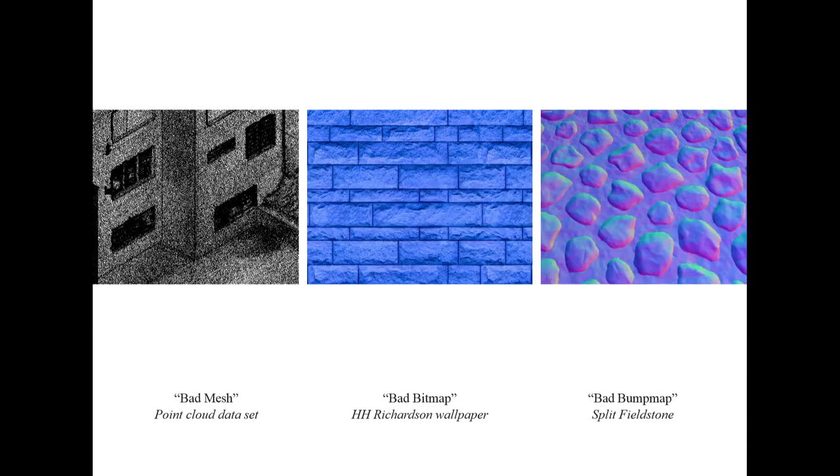So back in the studio, I have what I'm calling a bad mesh. It's a point cloud that's pretty dirty and messy. It's actually not accurate. I'm also combining what I'm calling a bad bitmap. So in this case, it's H.H. Richardson's rusticated blocks, and this is the wallpaper. And then the third thing is a bad bump map. So here I'm arbitrarily placing a split fieldstone bump to the render.

And so I did a series of renderings. Again, these are all in search for, the colors are so bad. Anyways, imagine pinks, blues, cyans, very pop colors. These are the materials that we're using both as the bitmap or the bump. So millennial pink brick, a cartoon made out of wood grain, vinyl siding, wood scallops, shingles, painted OSB. And so we start to take these materials and re-render House Lange and House Esters.

So this is a proposal for looking at, okay, they can be bricks again, but the bricks are going to be misaligned. There's going to be pink grout this time, and the pink grout is not going to be in the grout line. It's going to be on the surface of the brick. And so now I'm starting to think through, is it from renderings, is this a new set of materiality that can be made and constructed?

So here's OSB board, not OSB board anymore. It's a split fieldstone, and it's bright yellow. And then these are a bump map of a vinyl siding. Instead of doing it horizontally in the way we know siding is hung, it's at an angle, and then it has the image of the wood scallops.

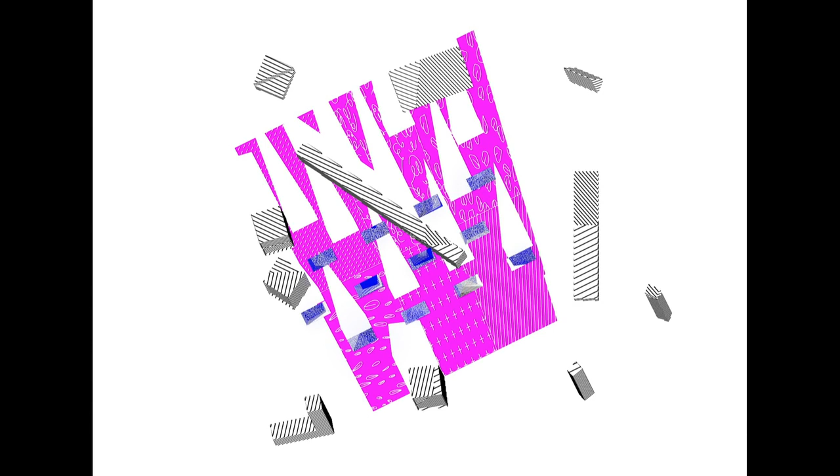Some of the materials. I won't go into detail, but it's a drawing first and a drawing trying to be built and spatialized in the public realm. So this is actually the plan of the project. This sort of looks like an axonometric, but it's actually the perspective. And then this is the axon drawing.

Number 4, propose a perfume strategy for a public park in Canada. So the next couple of projects were a collaboration with a former partner, Christian Stayner. This is just post-recession. There are no architectural projects to be built, especially for people just out of graduate school. And so we started applying for public art pitches. And we were pretty successful in making the short list. And the whole time, rather than giving the committees and these communities and these institutions public art, we always tried to spin an architectural idea out of it.

So in this case, we have proposed 11 perfume structures that would be spread throughout this park in Edmonton, Canada. Each of these sculptures is emitting a scent. It's a conceptual scent based on doing a reading of the history of the site. And as one would walk through, you would smell all these scents, and it would be a little confusing as to what time and place you are in the park.

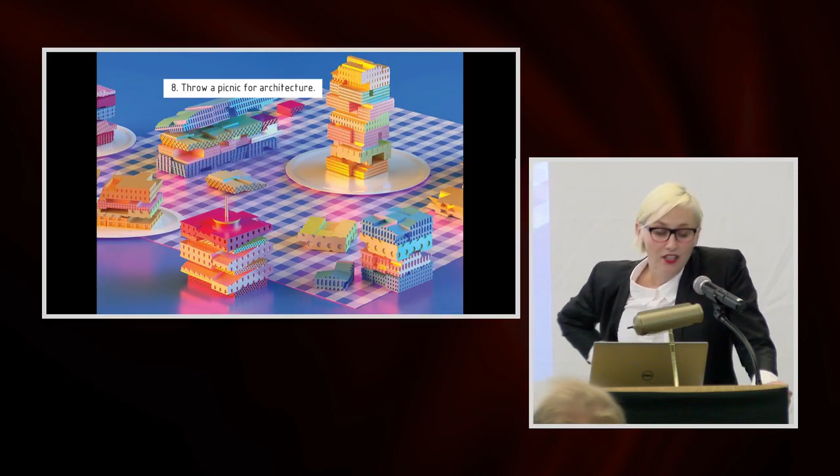Number 8, throw a picnic for architecture. So this is one of the images that's on your poster. So this is another way of hacking typologies. I'm now seeing the sandwich. This is a project called Best Sandwiches, as just another type, right? And so here you see a sub sandwich, a Dagwood, a BLT, a hamburger.

And this project is really about asking, this is a grilled cheese sandwich, asking, is there a way to think about architecture's problem of extrusion? So we no longer have to use extrusion singularly. We can now start to think about many, many layers and how different layers can stack without the kind of extruded tower.

And if you throw a picnic for architecture, you also have to photograph the sandwiches on plates in this kind of arrangement. This photograph was taken by a food photographer in Boston called Adam DeTour. These are 3D prints. The colors, again, are not good, but imagine pinks and cyans and yellows and more pink. And these are 3D prints, but they've been colored with flocking, so a very DIY craft kind of technique.

So the ambition is always to take conceptual work and turn it into real things, real buildings. So that happens in the faux brick project. It definitely happens in this project. This summer we looked at making this a BLT, actually a mid-rise tower in Atlanta. And of course we had to throw a picnic for it in some park in Cambridge.

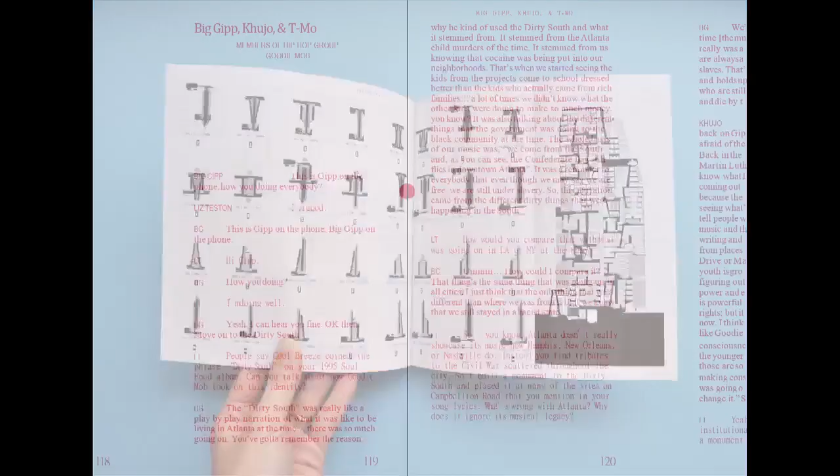And so rather than trying to figure out who the architects are of the Dirty South, we looked to the city and we looked at strange urban patterns that have happened over time. We clearly looked at John Portman's work. This is a student, Ian Freilich, who drew every atrium and then proposed an even stranger atria project. Half of the book is actually a guidebook with real places to visit and to see in the city.

Half of the guidebook is a conversation between the students and people like Big Gipp, Khujo, and T-Mo, some of the members of Goodie Mob, Denise Scott Brown, John Portman, Mack Scogin and Merrill Elam, and other theorists. So it's kind of an oral history recording. And you have to get the book to know what Goodie Mob says about why Atlanta got the 1996 Olympics, which is on page 120, which I'm not going to tell you. So it's on Amazon.

Number 10, question how architectural models are displayed. So this was a big project for me at the GSD where I was asked as a faculty member to be the editor of a student publication, the annual yearbook, I would say. But in this case, the dean really asked each of the faculty members to take it on as an intellectual project. So to read the pedagogy of the school and then package it in a way that's like a quick look into that year.

And so I was given a room full of brown chipboard and cardboard models and some white card models and white 3D prints, and just was not satisfied with the aesthetic that was going on. And so I did two things. One was to use this idea of a still life as the framing device for organizing work. So one could put work of a landscape architecture student beside an architecture thesis project, beside a core studio. And to momentarily put these things in relationship to each other in a temporary frame starts to say something else about the work.

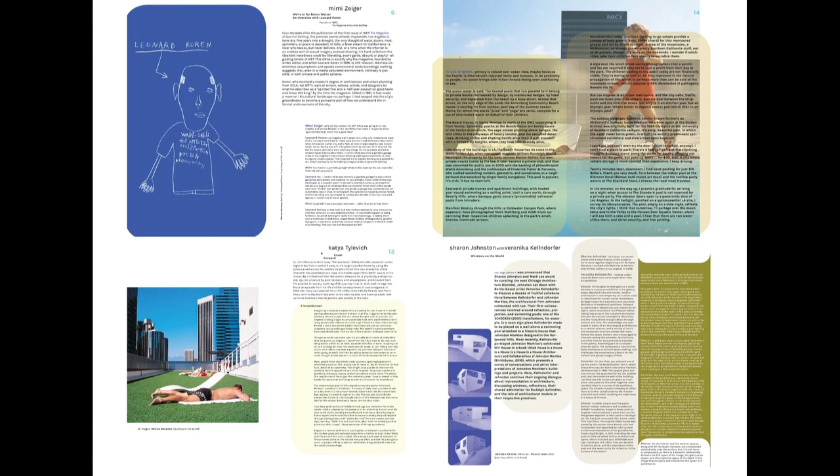And yeah, April decided to turn all the text a different direction. Okay. So I think those projects explain my architectural interests. It's work that usually begins with a question rather than a sketch, and it relates directly to popular culture. It's graphic, and it does heavily rely on art practice as inspiration.

So to describe Haus Gables, I'd like to place emphasis on 3 representational models: 1 being the massing model, 2 being the dollhouse model, and the 3rd being the one-to-one model. And so first up, we're going to look at the massing model.

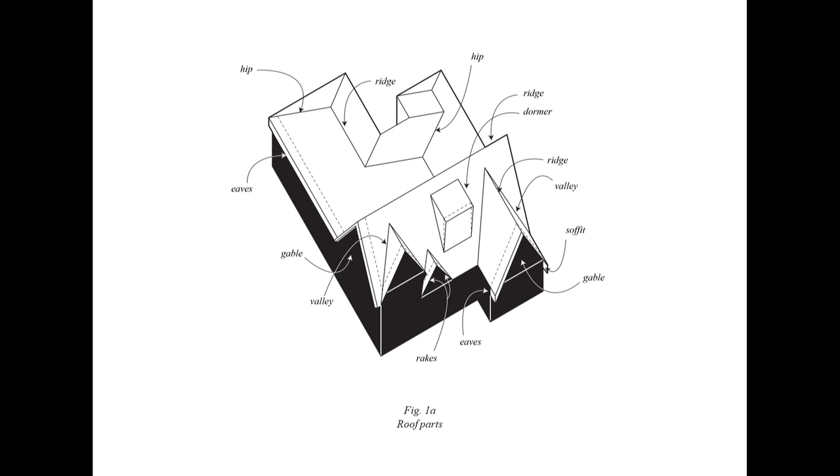Ordinary architecture is often overlooked. It's a throwaway. It's the stuff that's immediately accessible but usually tossed aside. I ask questions: what is the ordinary and why is the ordinary relevant now? And how might we flip the ordinary into a representational project? The ordinary is what I've termed the contractor stockpile.

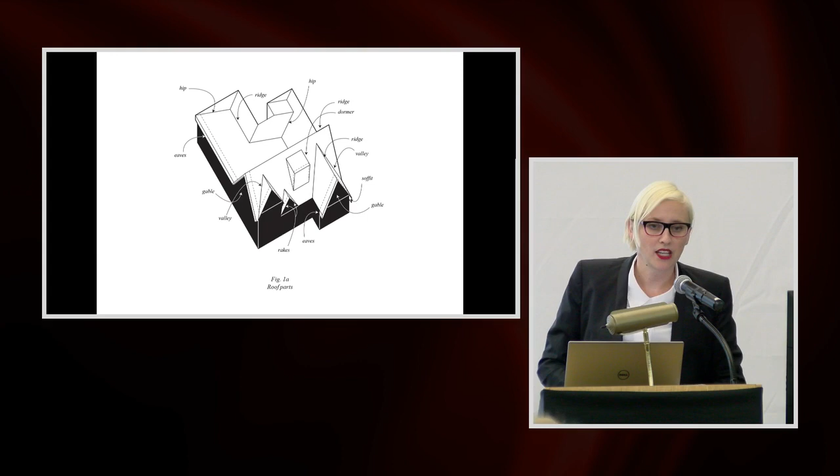So these are all things pertaining to the roof. The lingo goes like this: eaves, ridges, valleys, rakes, soffits, gables, hips, and dormers. One of the literary references for the contractor stockpile is Hawthorne's House of Seven Gables and the hashtag domestic hats.

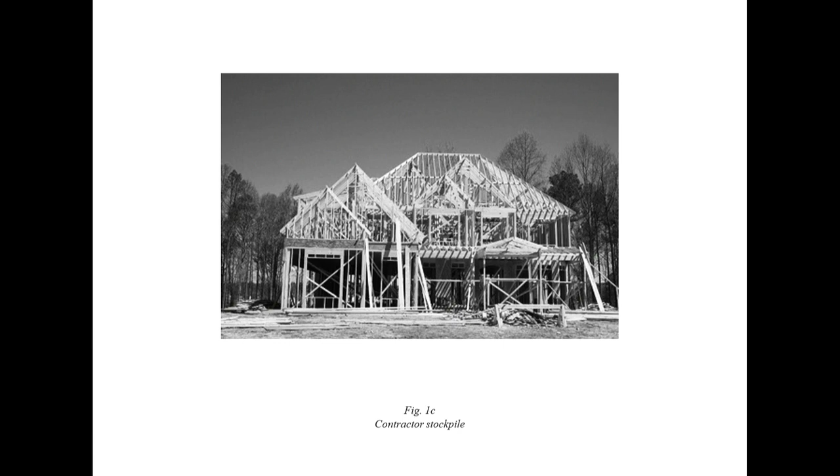If we consider the contractor as a geometrist for a moment, then it's possible to think about these piles of 2x6s in wood frame construction as a project of planar inclination. And I might go as far as to say that these geometries are the American version of the contemporary cathedral, which for purposes of close reading was all about the roof.

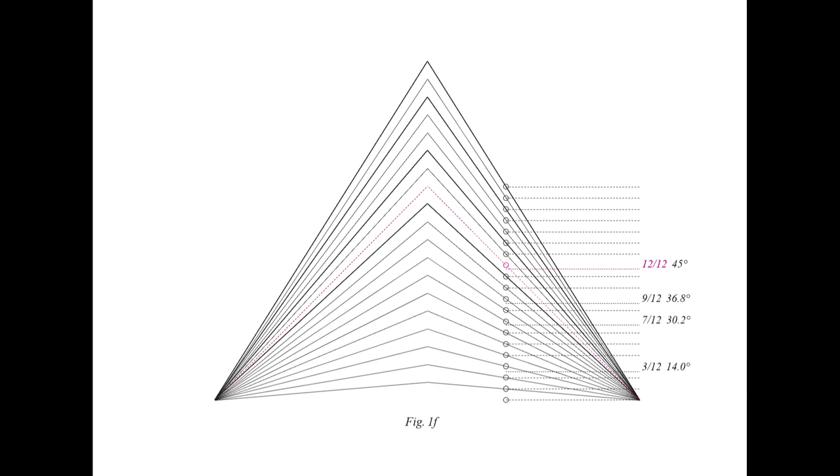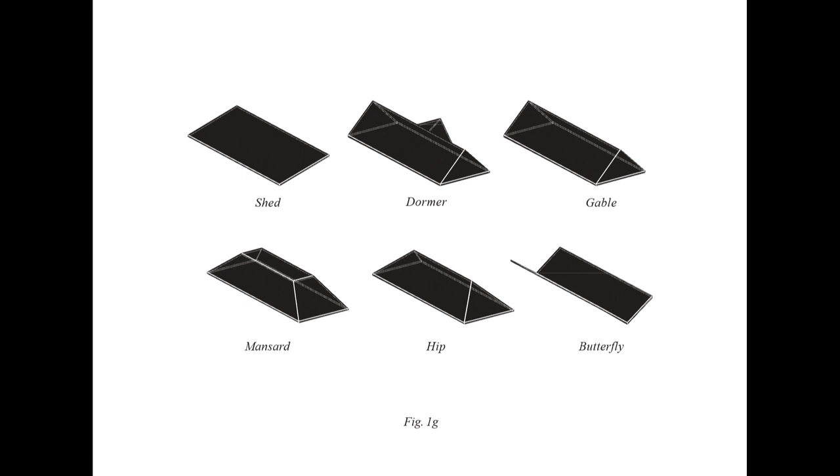In the contractor stockpile, there are endless variations of the domestic roof pitch with slopes such as 3 to 12, 7 to 12, or 9 to 12. And this is a straightforward catalog of basic roof typologies: the shed, dormer, gable, mansard, and hip roofs. They're so commonplace that we've overlooked the spatial possibilities of these roof types and what they begin to produce when we flip our thinking about how they might affect the project of interiority.

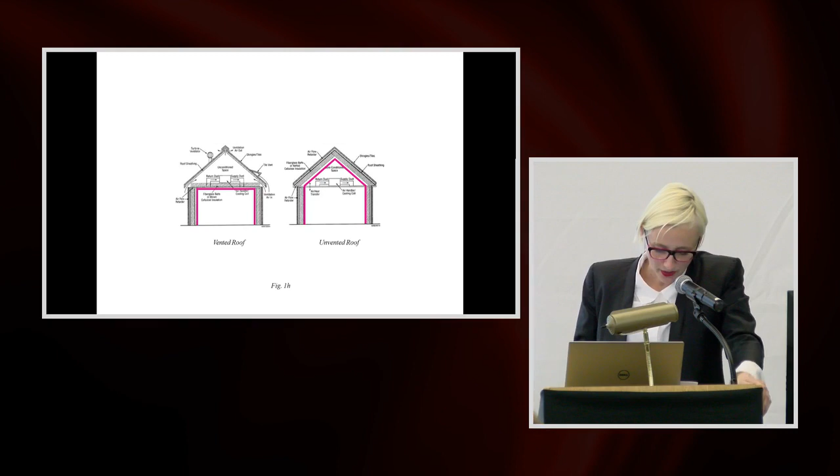Current modes of construction from the contractor camp promote building vented roofs, yet the unvented roof allows visual connection to what is otherwise deemed as attic geometry. What happens in the attic stays in the attic, as in the example on the left, where we almost never see the underbelly of the roof in the vented roof condition.

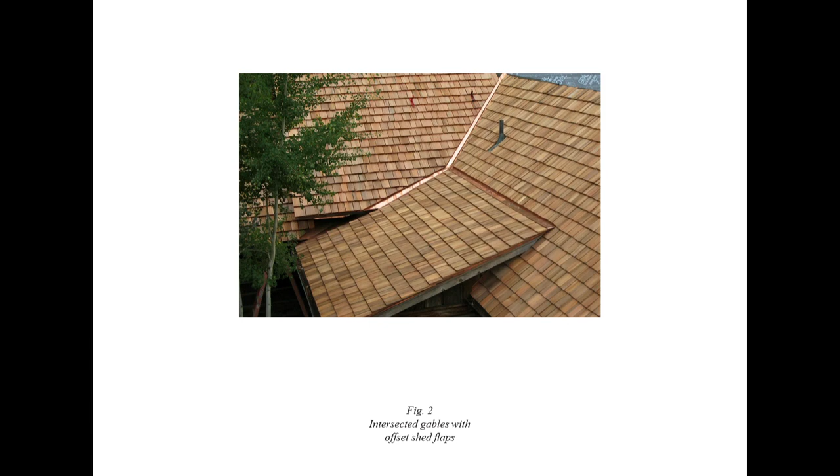Figure 2, two intersected gables with offset and misaligned shed roofs. Figure 3, chamfered triple hips with asymmetrical extruded gables. Are y'all seeing this? I've been studying this for a long time, so.

So in figure 4, there's actually a lot going on. It's really hard to write what's happening on this one. There are asymmetrical triple gables, 1, 2, 3, with a shed roof lodged in between. All of these roof forms are also intersected with 2 perpendicular and stacked gables.

But let's not forget about the single dormer over here. Or are there 2 dormers instead of 1? And did I miscount the first roof as a gable instead of a second dormer? And so you can see how it starts to get very complicated what's what. I'm about to call on somebody to do this exercise, so be ready.

And this is one of my favorite ones. I think it's from Los Angeles. Front-facing gable with a camel-backed hip, plus a rotated gable and a mini gable bump in the back.

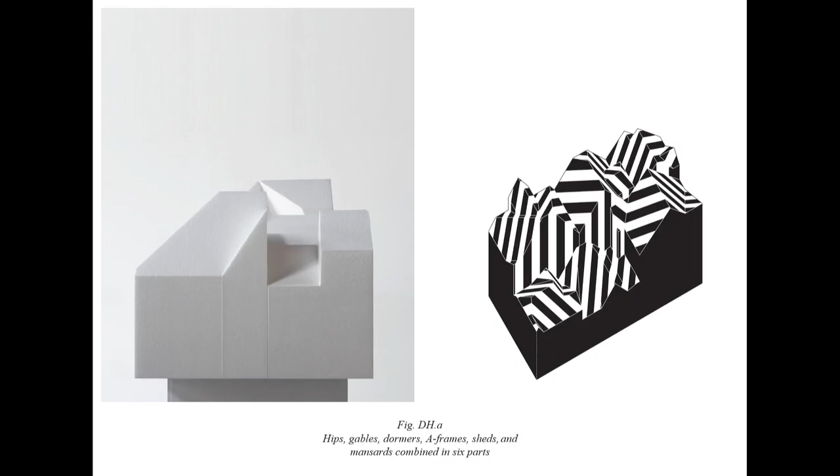So there's 16 of these models, and then there's one called the mega massing model. It's measuring 12 feet by 20 feet by 6 feet in height. And obviously in this exhibition, we're concerned with the massing model and its potentiality for architecture. So in the next series of slides, you can see how we've absorbed lessons learned from absorbing the everyday into a formal study. There's distortion, rotation, incremental scaling. We're asking questions like, what happens when an A-frame no longer produces a snug fit with an adjoining gable? Or when a hip roof no longer sits symmetrically as the primary volume?

So excessive amounts of formal qualities emerge when looking at all 16 domestic hats from the top view. The orthographic representational agenda for the project involves 2 axonometric drawings for each of the 16 massing models. One of these engages the very top of the roof surface in a kind of single razzle-dazzle drawing on the right, and the other represents the vectors required to cut the foam model on our 4-axis wire cutter.

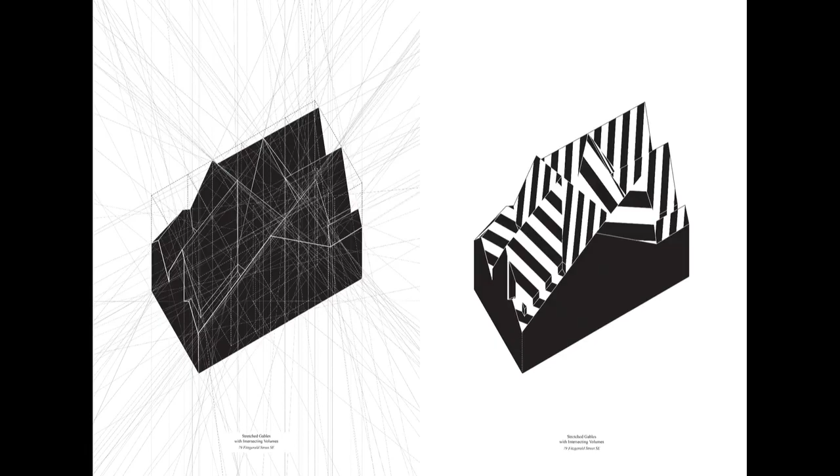So this body of work rethinks the role of the massing model in architectural representation. Massing models are usually small. They're the result of an iterative design process by the architect. They represent the schema, the diagram, or proto-architecture, often lacking detail or often made out of a singular material. Massing models distinguish differences in a volumetric study. So should we make it slightly thinner? No, let's make it a little longer, or better yet, let's make it fatter.

Domestic hats delights in these tendencies to engage multiples, but rejects the constraint of smallness. For these purposes, the models are scaled up to an awkward size without the luxury of detail or information. They were not easy to transport. They didn't fit in the frame of our wire cutter. And the massing models included in the installation are not large enough to be considered a pavilion, nor do they sit comfortably on a client's conference room table. Intentionally inflated, they merely represent themselves, no longer a representational stand-in for something else.

So after the installation, we took several members of the domestic hats team. These are friends now, and they're removed from the gallery and taken back out into the city, only to be dropped off as yard art on the front lawns of the original houses sampled during the original research. This person wasn't home. We just did it without permission because Michelle Nunn was running for U.S. Senate and she lost the race that year, but we were really thinking she was going to get it. And this postcard went out to thousands of people in the Atlanta area.

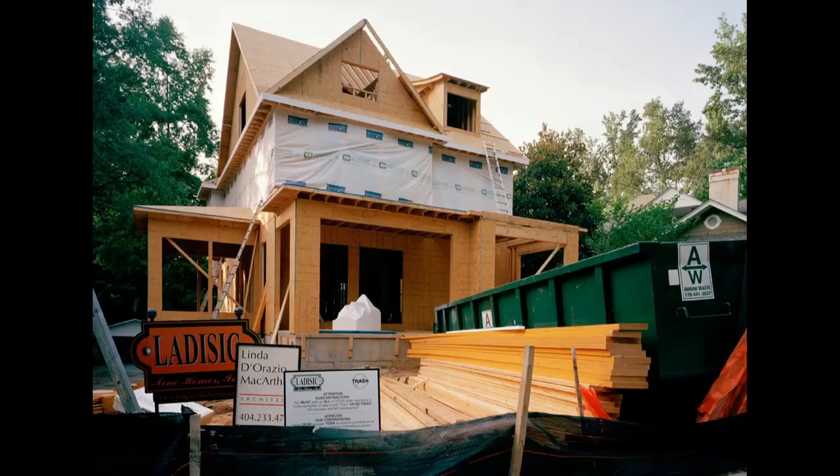These neighborhood friends begin to show off novel forms of the ordinary when positioned alongside standard gables, hips, and dormers. And just as the plywood has been sheathed over the wood framing, the contractor stockpile is operating at its best. Here, domestic hats is found sitting on the front porch, and it meets its match in the real example of the overscaled massing model.

Okay, the next. So if the larger conceptual project can be loosely thought of as working through three models, and the first model was concerned with representation, the second model, what we call the dollhouse model, is also concerned with representation, but presents alternative motives. So number one, we're now interested in materials. Number two, the possibilities for a new spatial paradigm. And I'll begin with the latter.

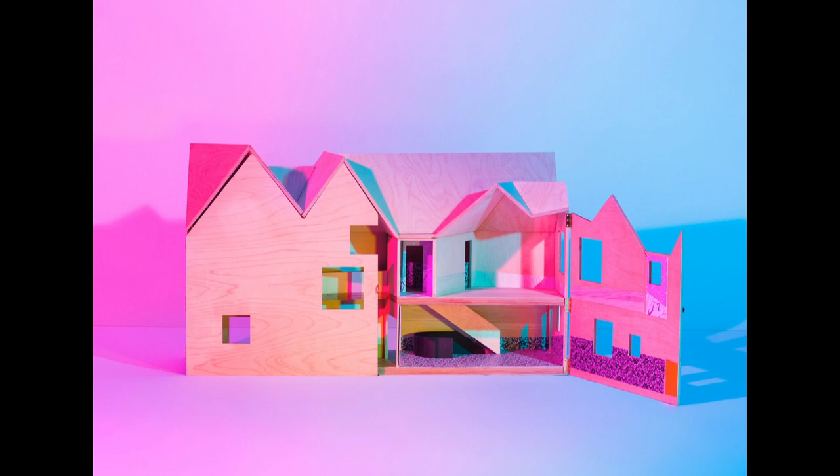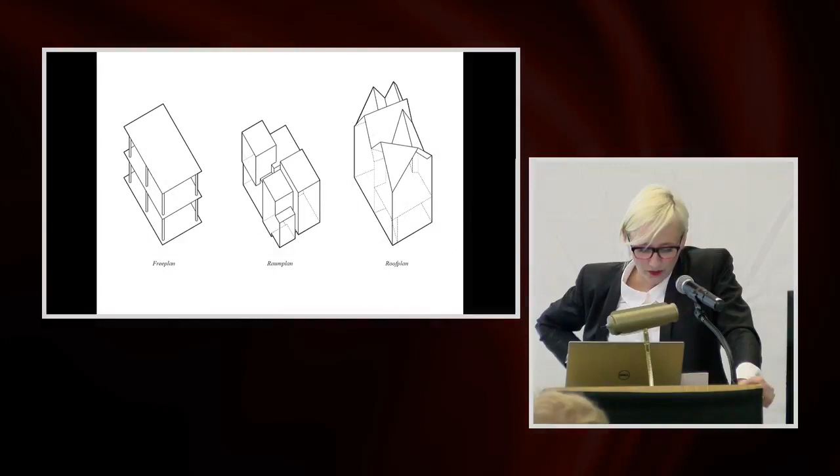Rejecting the free plan and the room plan paradigms of the past, Haus Gables and the dollhouse model invents what we are calling the roof plan. This is not a top-down orthographic drawing seen in a set of permit drawings. So the roof plan is not the typical roof plan anymore, but it's a potential paradigm or ideology that can reorganize how we think about space and the plan logic.

Anyways, I've crossed those out with a pink thing. You can't see it.

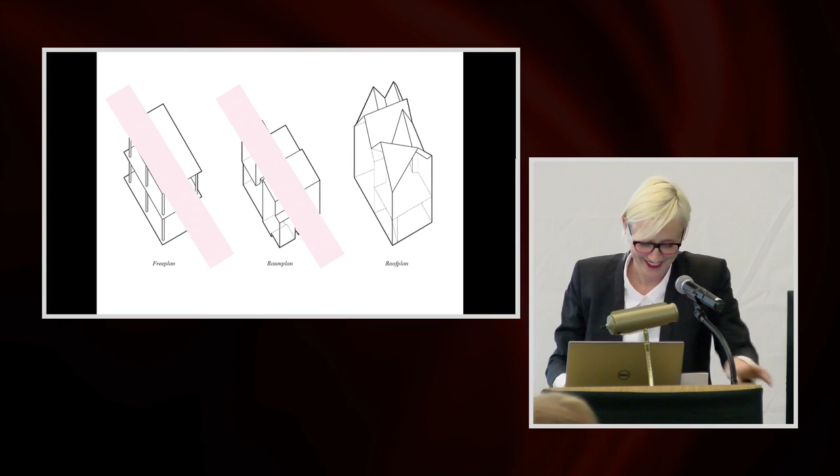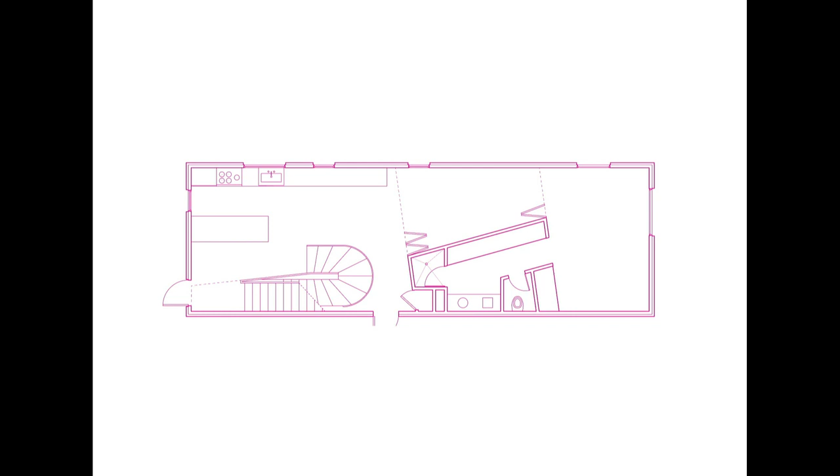So this is the first floor plan. And at first glance, it appears not to be concerned with the roof, but there are two spaces that allow for visual relationship between level one and the underbelly of the roof. And so this happens right here and right here. Plan two, the roof consumes the plan, while roof rooms discretize and dominate the plan logic. So in section, you can see that some of the roof rooms are actually being hung by the roof forms.

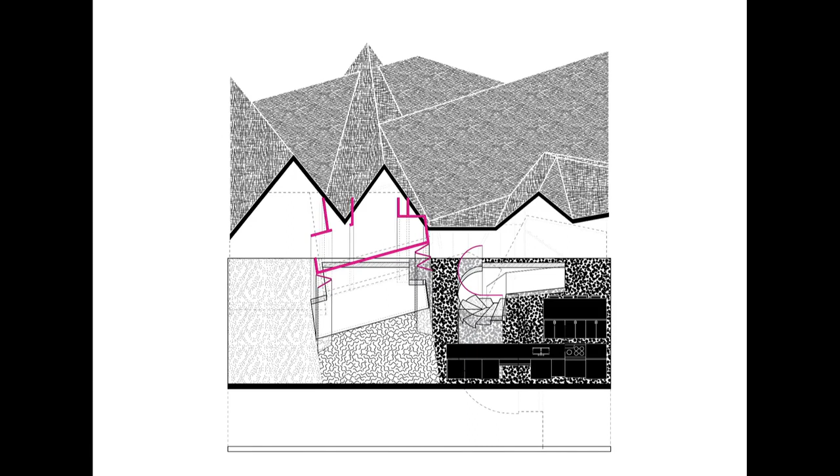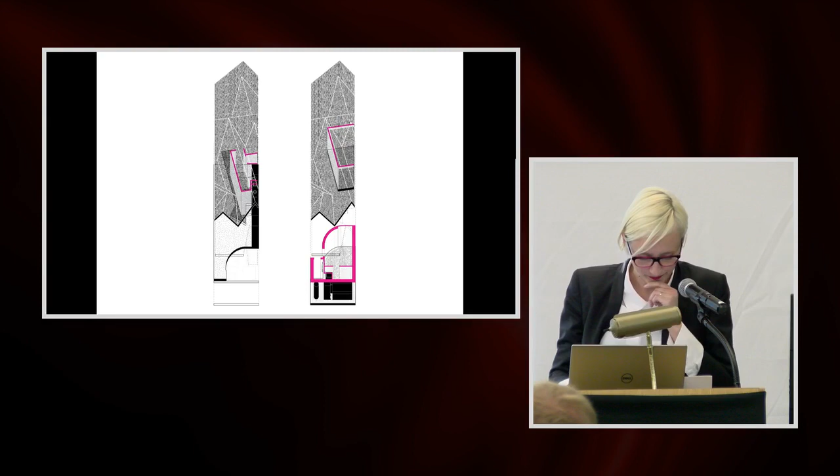And in the next set of drawings, we're working through the scale of the dollhouse model in a digital model form and through drawings, trying to spatialize how the roof plan might make inflections on the interior organization. Following the spatial logic of the roof plan, the interior materials are literally mapped onto the room, but without an overall logic. Only carefully determined by room basis.

So everything that you see here in the dollhouse model is actually made of Baltic birch plywood. In reality, this becomes large sheets of cross-laminated timber panels. But we've decided not to cut the dollhouse into the 87 panels that make up the house. We want it to be a dollhouse. So the actual doors open with a cut seam down the middle, just like a dollhouse would, to reveal the section. At the 1 to 12 scale, these materials are graphic, they represent pop, and they are not what they seem. We all saw the poster, and the posters look better than this, so you know what it looks like.

Situated in the American South, the project undertakes an old tradition of faux finishing. For Southerners, there is this history of not being able to afford precious materials and a subsequent desire of faking it. Seen here in the Southern Institute of Faux Finishing, this is a real place. It's in Brandon, Mississippi. I've never been. I'm never going to go. But it's an example on the right of a porcelain bathtub decked out as faux marble. So this is just a normal bathtub made out of porcelain, and then they really wanted it to be like a carved piece of marble. So there's a painterly effect going on.

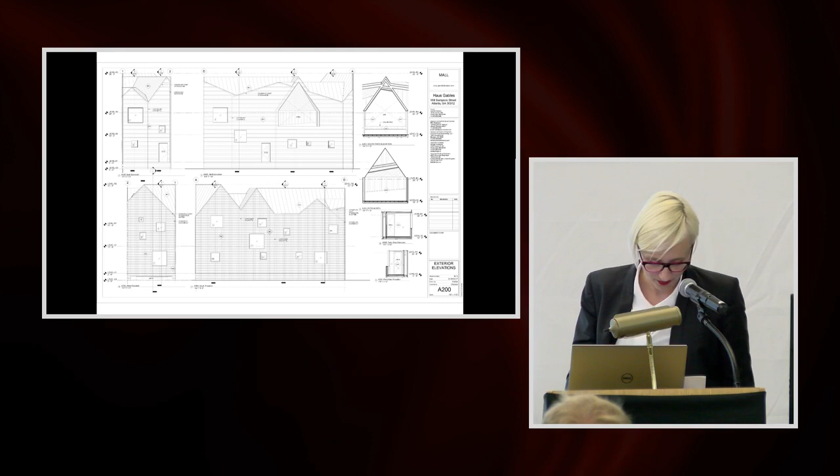On the exterior of the house, I'm interested in looking at what a drawing might be that's 55 feet long of brick, and what maybe two sides of the house might be made out of wood grain. I'm also combining, obviously, always the high and the low. So this is a series of paintings by Mary Corse, the white light paintings from 1968, where she was using the reflective glass beads used on roadway markers. And she's using this as a material to make a painting. So why can't we scale this up and make a whole facade with this material?

So these are our tools. At the GSD, I'm working with students on this research project where I'm trying to make a one-to-one example. So we make this little brick jig. These are a pile of glass beads. And then we CNC'd a custom roller that looked like wood grain. And so we made these one-to-one mock-ups that were displayed in the Yi Yang gallery. They're hard to photograph, but basically when light hits it, you get the reflectivity.

This is actually installed and built in the house in Atlanta. On the left is kind of at dusk where you see the kind of fake bricks. And on the right is when a flash hits it. It's like total sparkle. So this is where the 1,700 square feet of glitter stucco comes into play. This is the front facade, super flat. It's trying to be brick. It's not brick.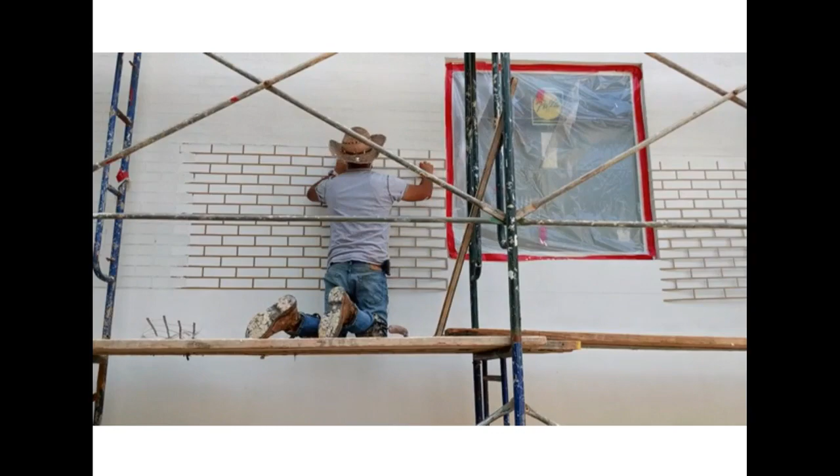And this is the subcontractors installing. It's just a commercial product. It's a sticky back sticker. It's a piece of paper. It's stuck onto the stucco. They trowel on their last coat.

The thing that really threw them off is I said, okay, but we got to throw these glass beads into the final coat, and it's called a dash finish. It's a thing. They were like, no. So, anyways, there was a big struggle of putting the glass beads in, but we did it. So when you see all the stickers on the full 55-foot facade, it's kind of exciting.

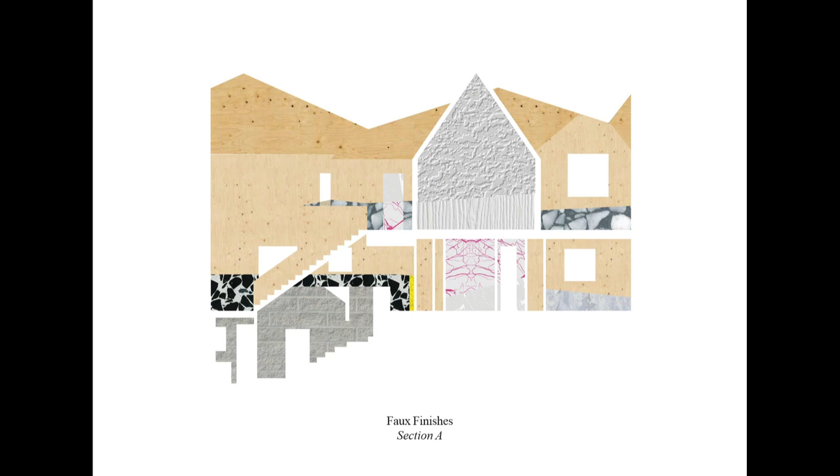On the interior, there's also faux finishes. And so, again, each room has a different faux finish. So we're using terrazzo tile. Terrazzo is usually poured in place and ground down, in places like Spain or Greece. We've just purchased it as a tile, so it becomes like a sticker. It's very thin. We're interested in using a bunch of vinyls that look like marble. We're interested in using ceramic tile that looks like a cartoon drawing of marble.

And then this one here is a ceramic tile from Spain that looks like OSB board, but it's expensive. So some of the rooms here, it's not the $15 a sheet at Home Depot. It's a little bit more pricey. These are 2 rooms where you walk up an OSB board stair and you enter into terrazzo, and then you get on another stair and it's another kind of terrazzo. And then in the bedroom, imagine 3 different marbles kind of colliding, and they're made out of ceramic and vinyl.

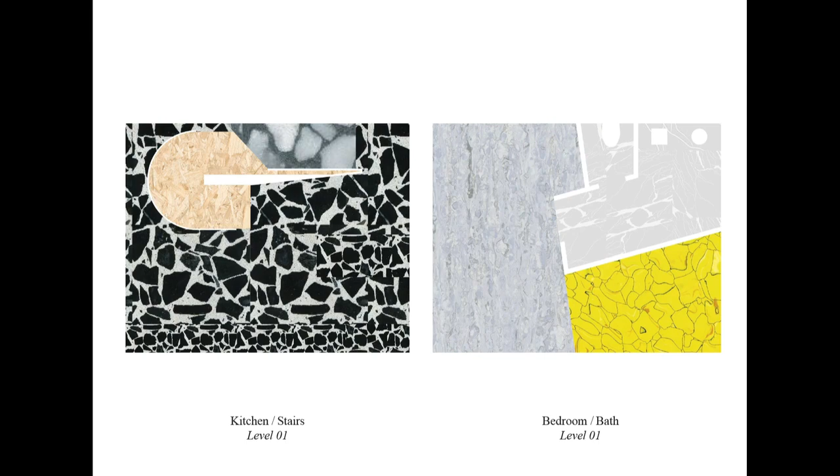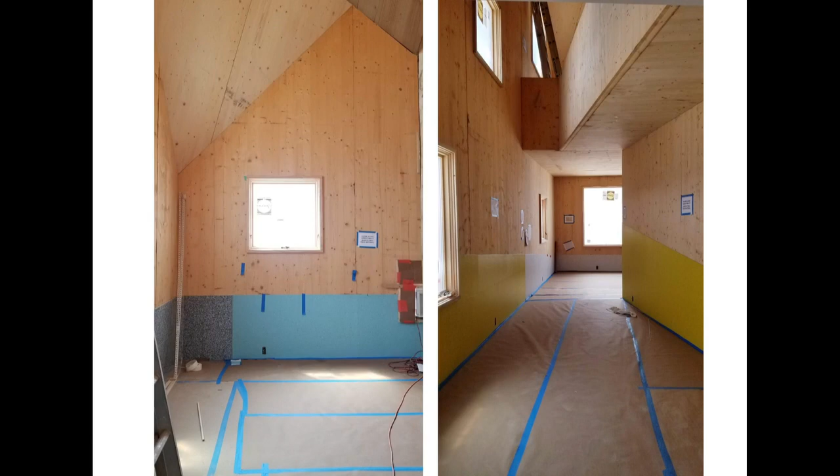These are the faux finish plans. These are some of the faux finishes installed on the site. Everything's at angles. None of the angles make sense. This is a tiny, tiny little triangle terrazzo tile. The faux finishes are wrapping up the wall, kind of like wainscoting, so it's trying to be proper. This is a corner in the shower. And this was it about 8 weeks ago, as they were installing the faux finishes.

Before moving into introducing the third and final model of the project, just to note a few things about the house's relationship to site, because that's what architects should do. This is a site plan noting 4 narrow urban lots. Each of these properties are 24 feet wide. The property came with a variance with 3 feet. So on each side of the long lot, you have to build within a 3-foot setback. So the total width of the construction of the house is 18 feet, which is the same size as a single wide trailer.

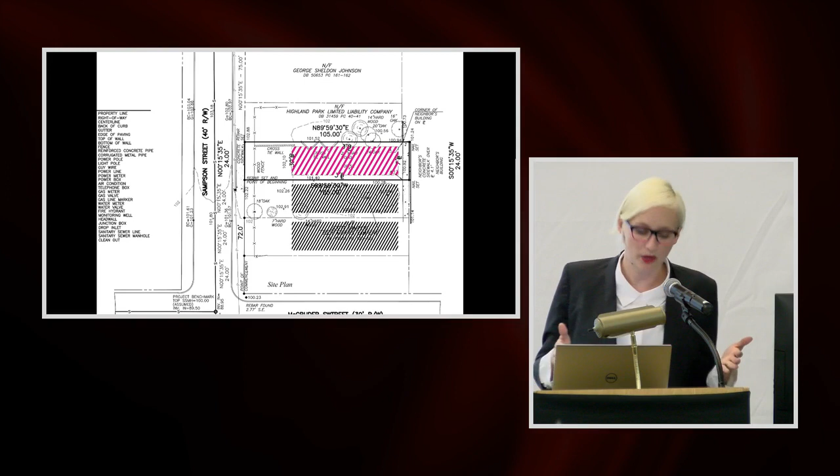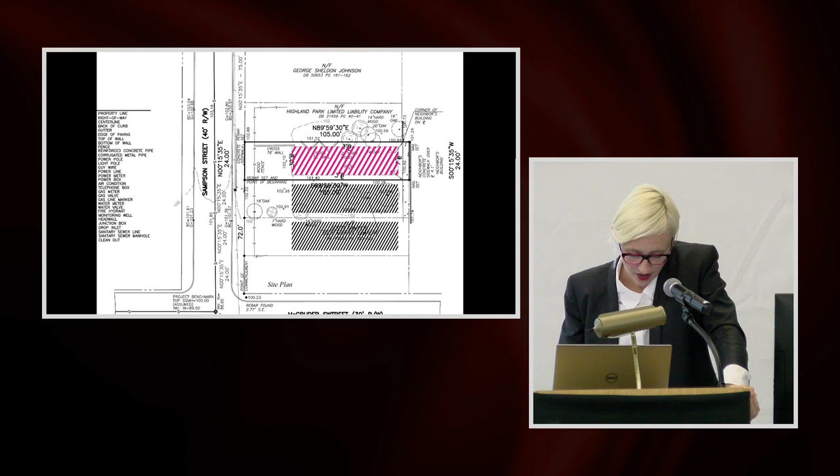The massing model then becomes the one-to-one model, and this is what we started with. So remember I showed all those pitches of under 12 to 12. We're going above that, and so there's 17 to 12, 14 to 12, and 19 to 12. So we're exaggerating the gables. So I've thrown all the hips and dormers and mansard out. They're dealing with 6 gables. They're pairs, and they're colliding into each other in problematic ways.

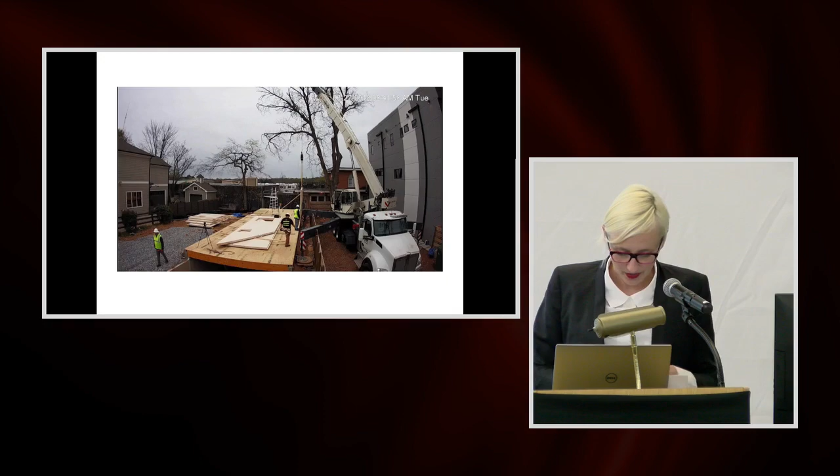So the third model that I'd like to speak about tonight is the one-to-one model. And so this is a 2-minute animation that shows the construction sequence. There's 87 cross-laminated timber panels. They're assembled together with a 40-ton crane in 14 days' time with just 4 people.

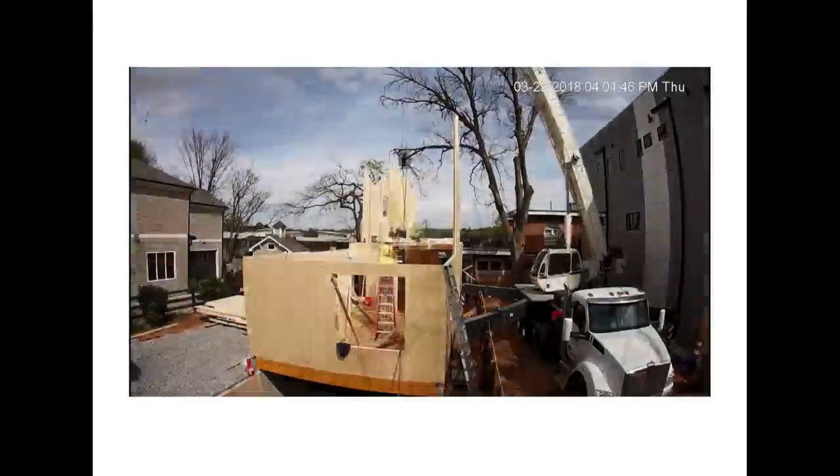What's super interesting to me is the way in which the real construction is most definitely trying to be real and serious, but it starts to remind me of the scaled-up model being assembled in studio or in an office setting. And if you squint your eyes, the filming of the construction sequence reads just like a model being assembled out of cut material like chipboard or foam core.

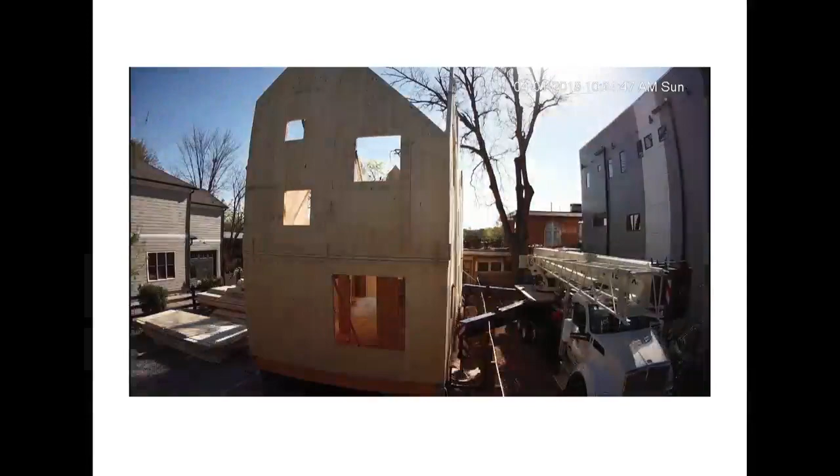There are 4 engineers on the project. Hanif Kara of AKT in London, an engineer out of New Hampshire, a group called Bensonwood. They really worked with me on design development. And then they hired another engineer called Fire Tower, who specializes in mass timber engineering, and that group was really doing the calculations. And then there was an engineer in Atlanta called PEC Structural, and they're designing the connection between a concrete box basement and the CLT box.

Logistics was a very major piece of this project. There was someone assisting me in the organization of the shipment and transportation of all the panels that were in the Port of Savannah, which is about a 4.5-hour drive to the site. And if you watch the trucks coming in on the left, all these layers and stacks of panels are getting dropped off, delivered.

There were 11 40-foot hotshot trailers bringing materials from this warehouse. It was very stressful. The installing team did not want too many on site at the same time. They needed them to be in order. There was a precision that had to take place.

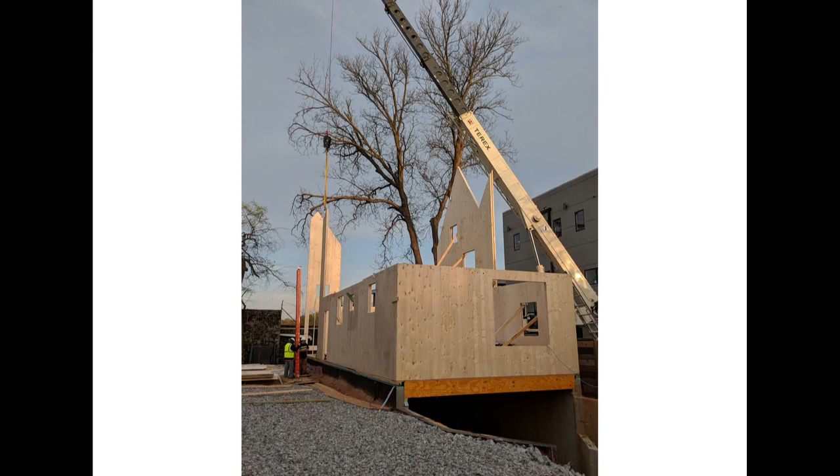The crew, so this is the second fully CLT house in the US. The first one's in Seattle, made by another female architect called Susan Jones. And I called her and she said, you should hire my super that put mine together. And so I called Terry Ducat and said, you're the expert in the country. Will you come to Atlanta and put this together? Because no contractor kind of wants to touch it. And so he came and brought 3 of his friends, some of which didn't have construction experience.

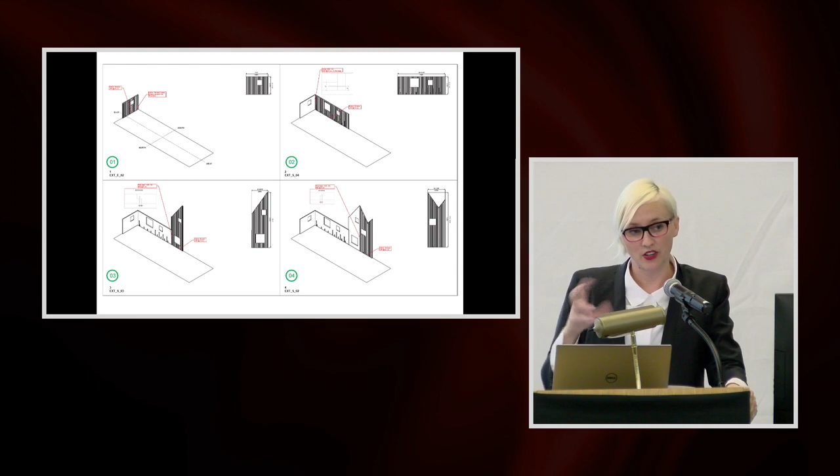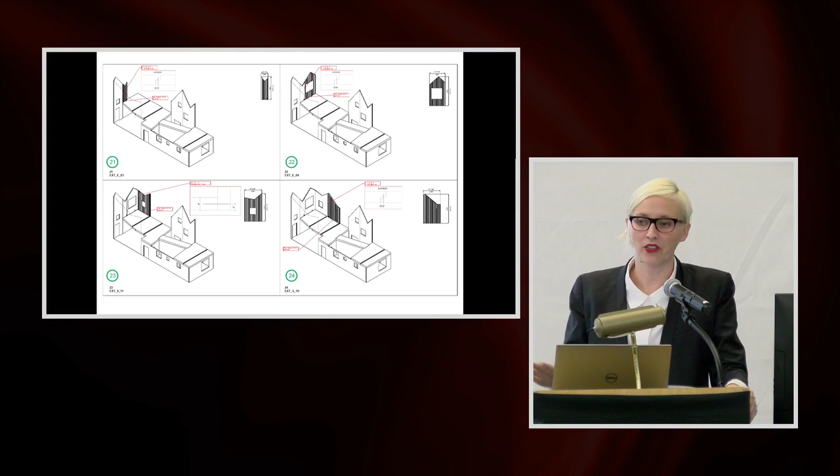The whole thing's put together by 12 to 14-inch screws. So it's like a big IKEA Pax wardrobe or whatever. These are the drawings. So Terry, actually, we did a few screen shares where he saw the digital model and we walked him through it, but he's really putting this thing together based on this set of drawings, which is a kind of cartoon, step-by-step, panel 1, panel 2, panel 3. And so I'm organizing my guess at the order.

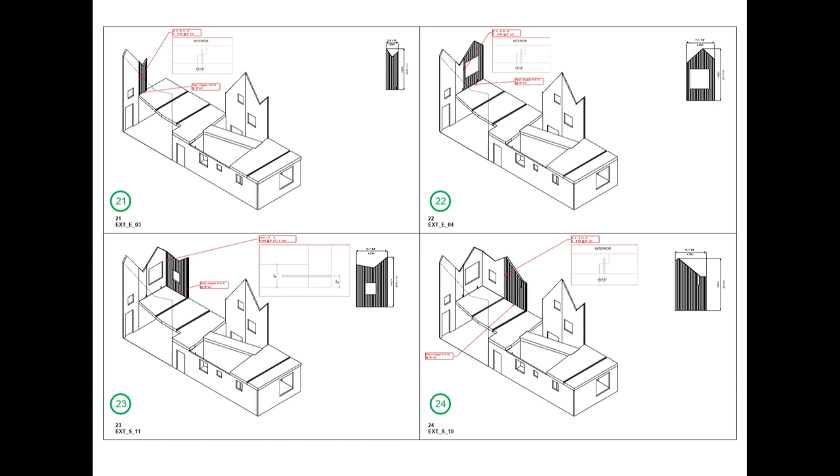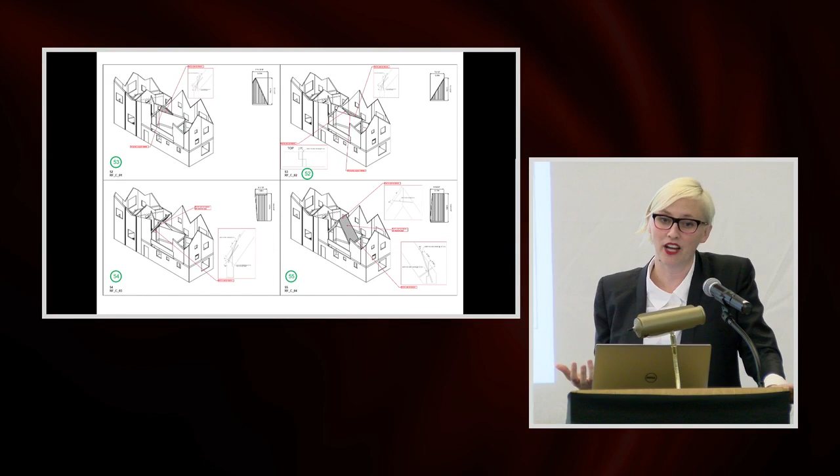I'm taking on his comments, and then I'm also talking to Bensonwood, who's engineering all the connections. So you can't see it, but every callout shows every connection for the 87 panels. Sometimes it's butt jointed, sometimes it's super straightforward, sometimes it's an inlay, sometimes a rabbet joint. The screws are going at different angles so that they don't pop through to the interior. All the interior is exposed. This is finished product. So when they're installing, every time they hit the panel, knock it, this is the final product. So it was very stressful. These are a kind of menu of all the different panels.

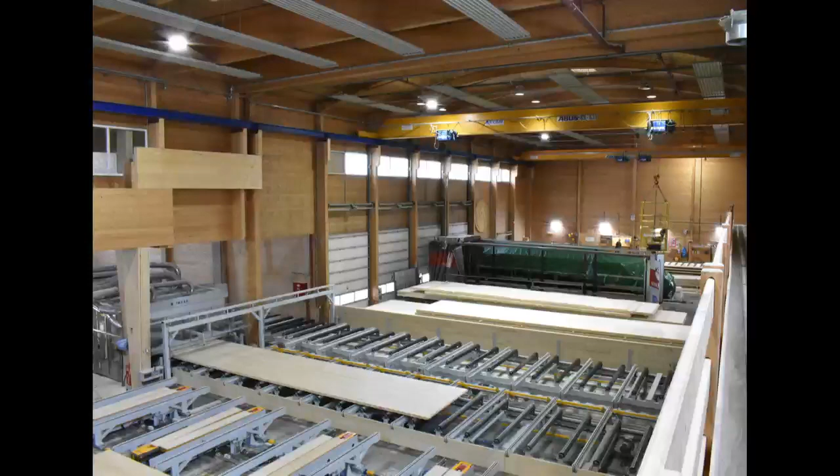Before this, I also want to mention the risk. The panels were purchased from KLH in Austria, and they came in about $85,000 cheaper than our North American CLT manufacturers. And so you have to pay that money in full to get the materials before they even start cutting. So the engineers in London went over, inspected the materials and the process before they got put on 3 open-top shipping containers. Open-top means it's going to be on a ship for 5 weeks, and who knows what you're going to get when it arrives in the Port of Savannah.

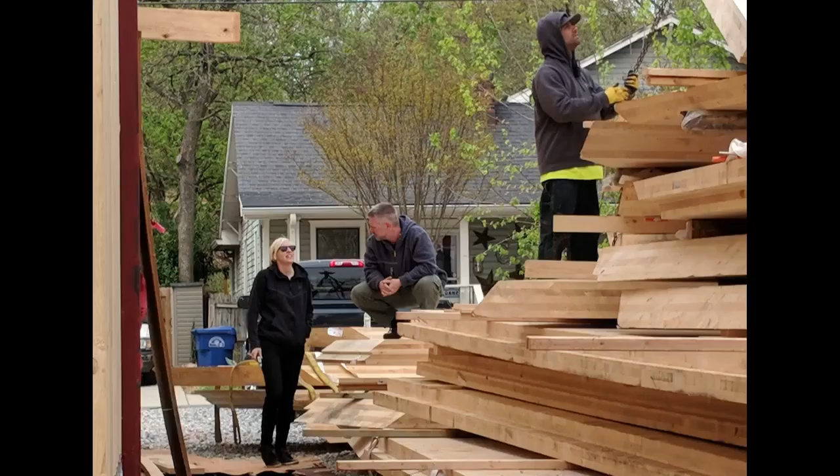All of these 87 panels, they're all unique, of course. There's nothing similar, nothing repeated. They're all CNC milled. These are the kind of angles that are happening to achieve all of the formal gymnastics in the roof. There's stacks and stacks of these things arriving on site.

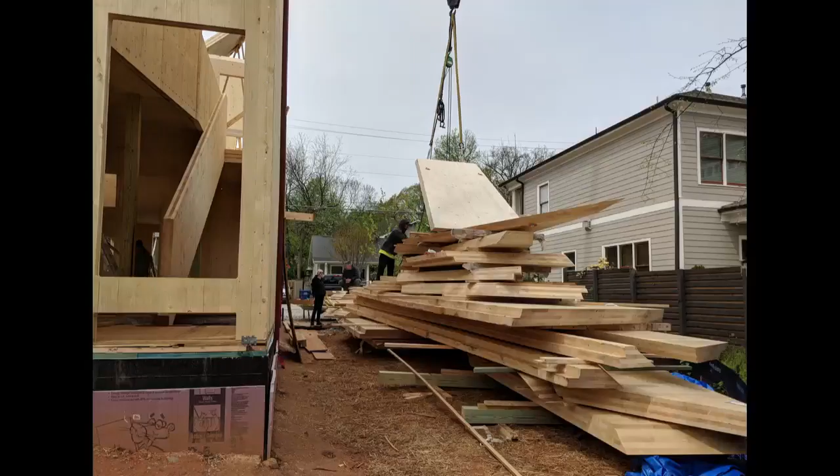Sean, he does work in construction. He's the guy organizing the crane operator. You know, a crane putting together a house in a very urban in-town neighborhood is confusing to everybody. There were a lot of people super interested in what was going on on this tiny street. And all of them were numbered and labeled per the order, except I gave the order and then it got jostled around, and so there was another numbering system having to be figured out on site.

This one needs music to it, but.

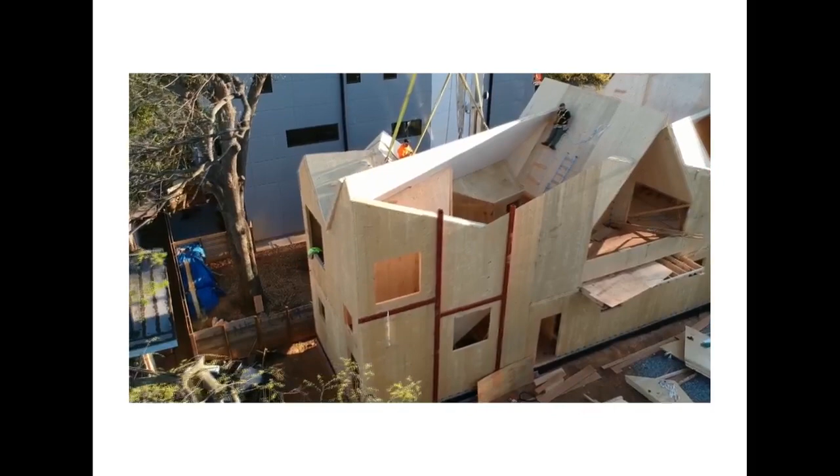So that's Terry. He somehow happened to be right in the best spot when the drone arrived on site. He's installing the longest, biggest, heaviest panel.

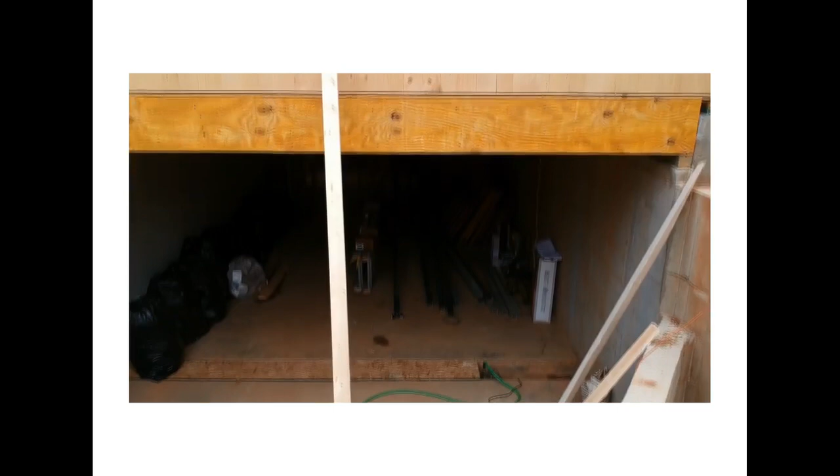So there's really large windows. Again, trying to do the picture window thing, but this time, the CLT is doing the work to make that possible. All the windows had to be cut and organized before they arrive on site. So trying to figure out the detailing of the window, we just kind of went with the rough opening dimensions and said, well, we hope we will figure out the wall assembly as we go.

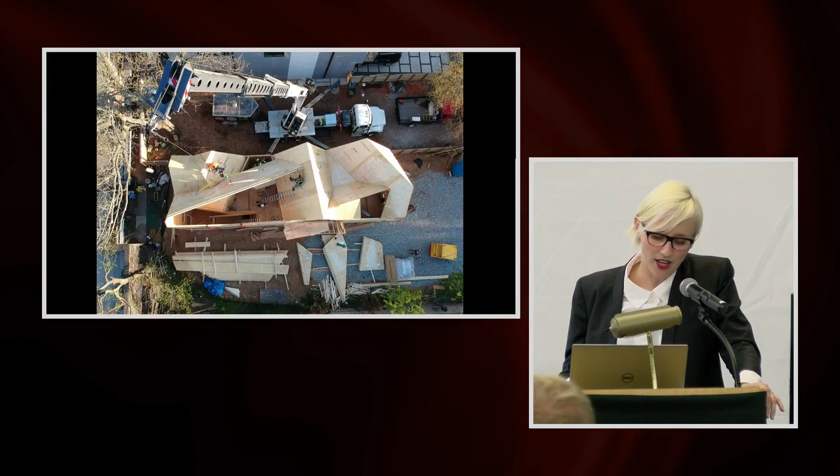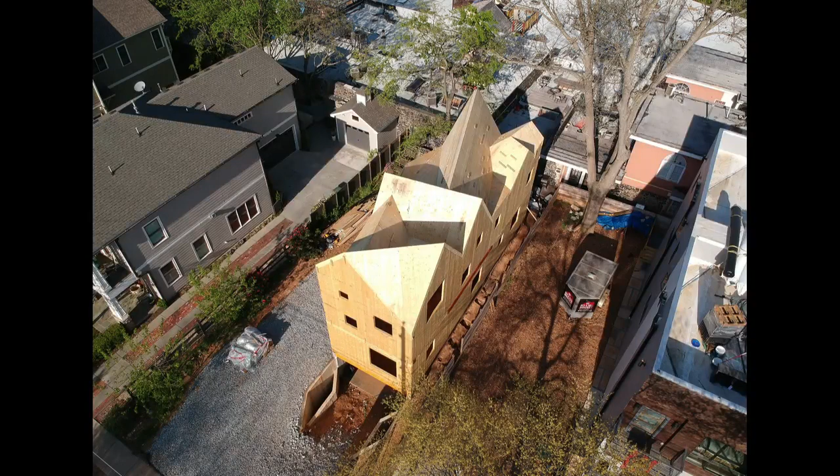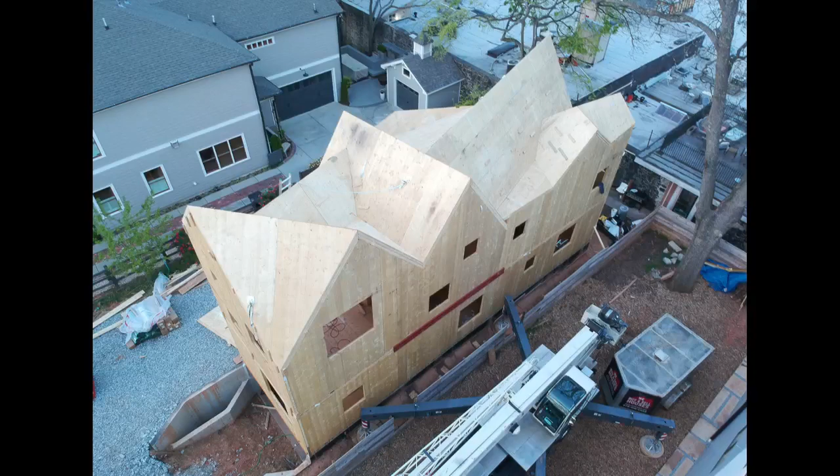Right after the CLT was installed, we had about 6 hours before we needed to start weatherproofing and getting the windows in, because any amount of rain or moisture hitting these panels is problematic. And so we brought a photographer out to shoot the project in its kind of raw state, without windows, and so this is the kind of one-to-one model, and its representation is through this series of photographs.

Uh-oh, what just happened? Oh no, what is this? Now my whole computer's like... It's like frozen. I wonder if it's the cable down here I'm stepping on. So it's on my screen, but it's not on the big screen. Oh, it is now. Okay, we're back in order.

Okay, this is one of my favorite shots. It's of the room that's being hung by the roof. And so you get this kind of perfect gable inside of a very not perfect gable assembly above. So in the next few slides, this describes the wall assembly. So when building with CLT on a tight urban lot in Atlanta, we have to prove a 1-hour fire rating because of the proximity of neighbors. And also Atlanta is working with the city building code of 2012, not 2015. In 2015, CLT is approved in code. So there's a lot of hurdles to get through.

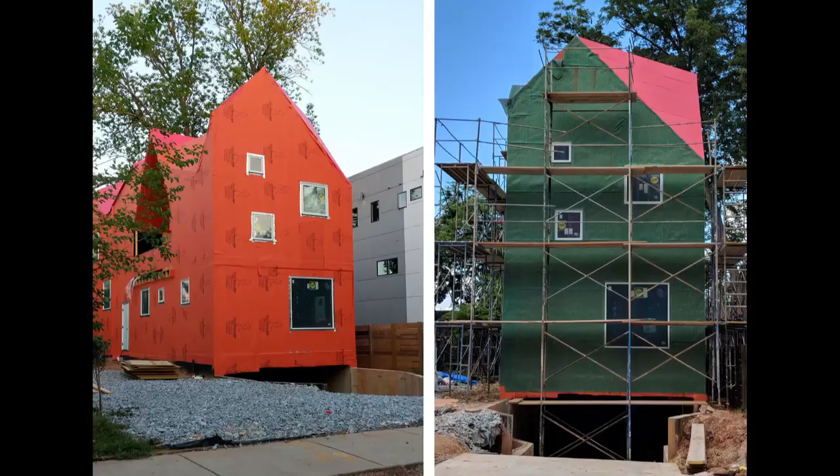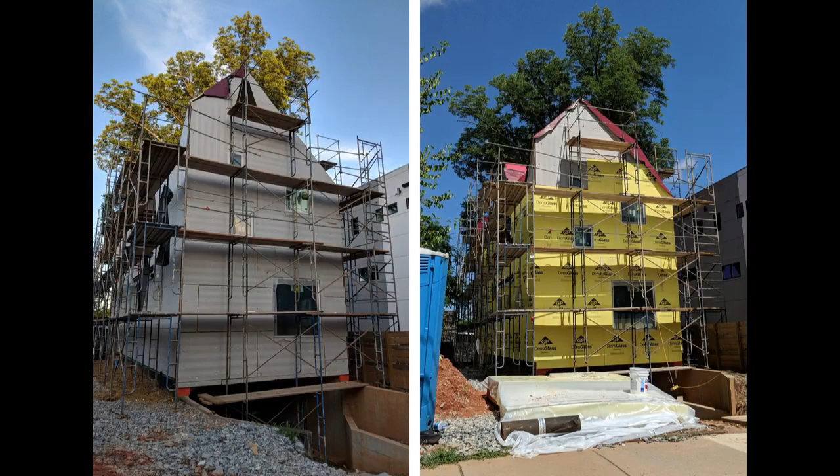R values. And then the yellow was the DensGlass that had to be put on because of the fire rating. And so then the next layer is the wire mesh. And then we start with our first coat of stucco and our second coat of stucco. And this is cementitious stucco. And then, of course, the last layer is that very thin sticker and the glass beads. This is it a few weeks ago. It's going to be finished next Wednesday. I'm sorry I don't have professional photographs to show you, but this is the attempt at building the massing model at 1:1.